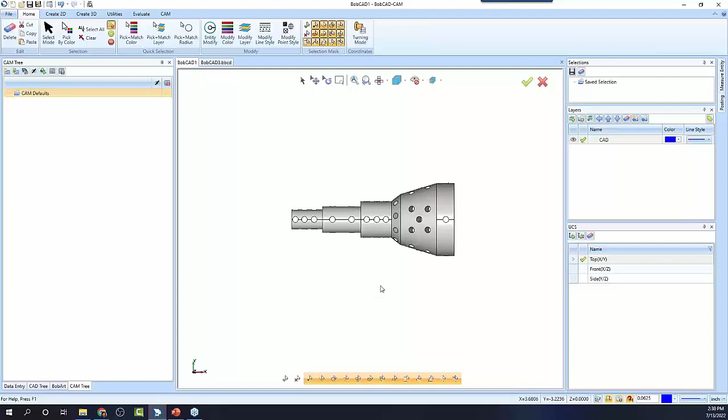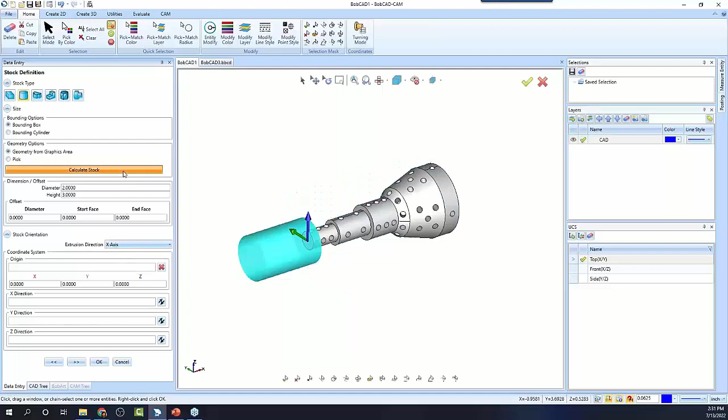I'm just going to create a new job for a 4-axis mill. All right, our stock, we're going to do cylindrical along X. All right, and my 0 position, I'm going to set here. Okay, and then I'll set up another one. Insert setup.

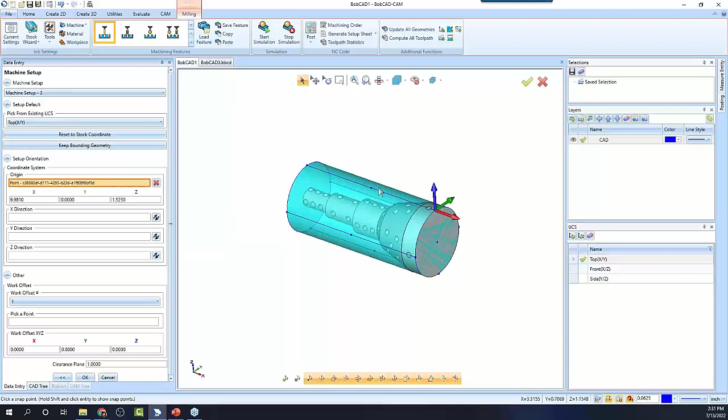And our 0 position is going to be there. Okay, so this one, you can see it's on center. This one's on the top. Okay, so we're going to start with the center one first. We're going to add a wrapping group. Add wrapping group. Geometry is wrapped. Show is wrapped. Use stock diameter.

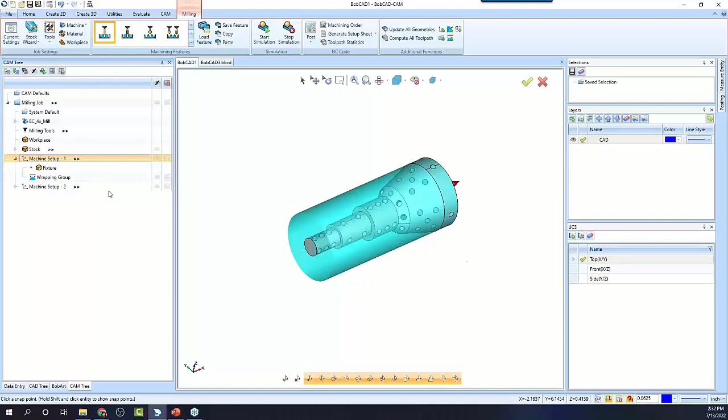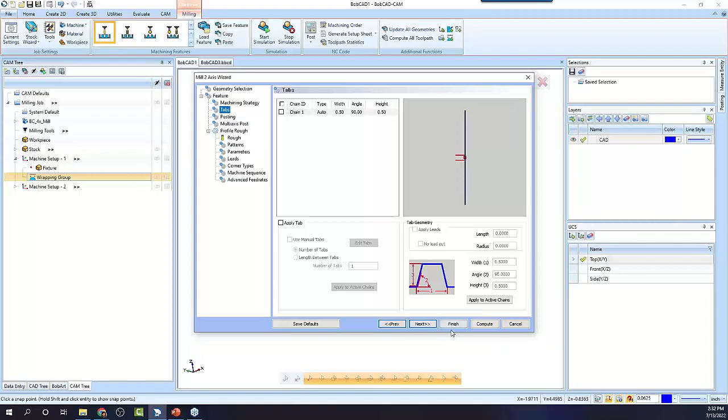We'll say OK. All right, so essentially we want to machine a feature. So under this wrapping group, we can load a feature. So I could say this edge right here, I want to cut. Okay. And then I want it to go down to this depth. Okay. And then the strategy I'm going to use is a profile. And let's just compute.

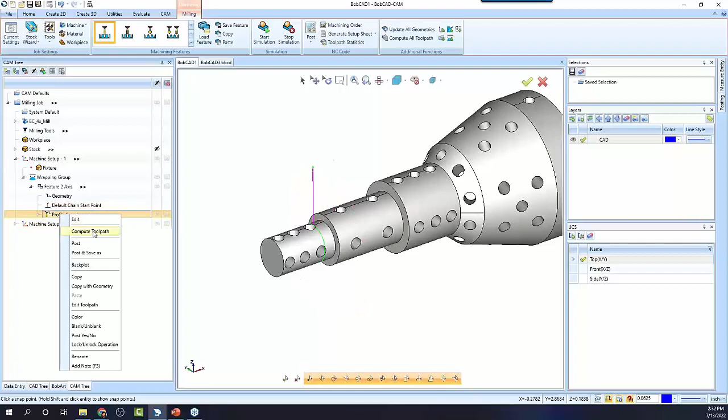All right. So you can see that it is wrapping to it. Let's turn the stock off for a second. Okay. We can see it is wrapping to it. But what we want to pay attention to is the side of the line, and this has to do with your arrow direction. So we could reverse that and recompute. All right, so now we can see using that wrapping group, we can have it just come down and cut that slot there.

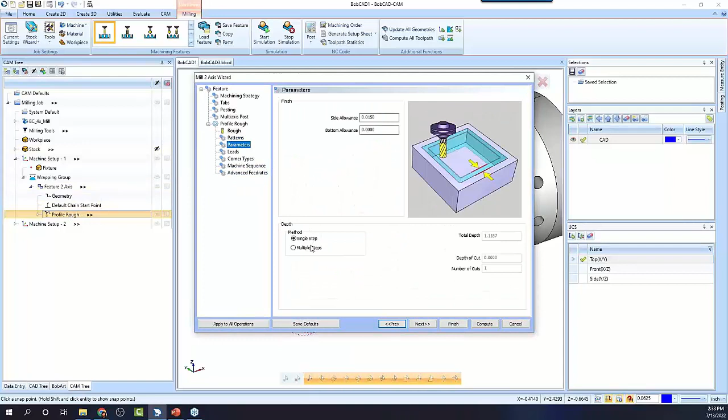We also could utilize some of the other options, maybe have it side rough. Maybe there's an inch of material and we want to take it in 6 passes. All right, so what that will do is step down and work its way around. What if we didn't want it to go to clearance between each pass? We could say, let's see if we can say stay down.

If we have multiple steps, should be able to get it to stay down here. Let me see here. All right. Well, it's not the worst. Let me change this. Let's go to a lead right angle. Okay. Let's go to bidirectional cutting.

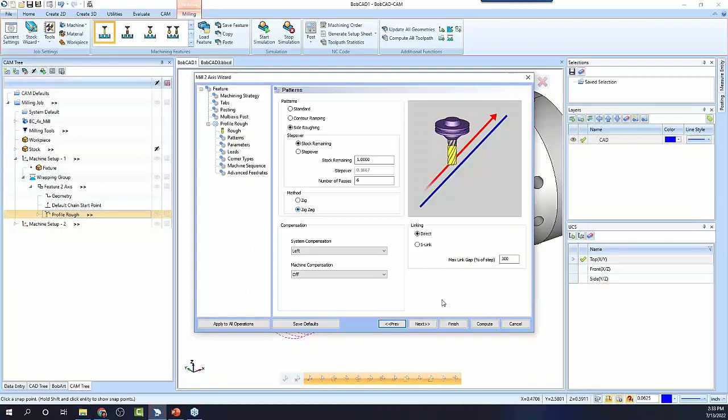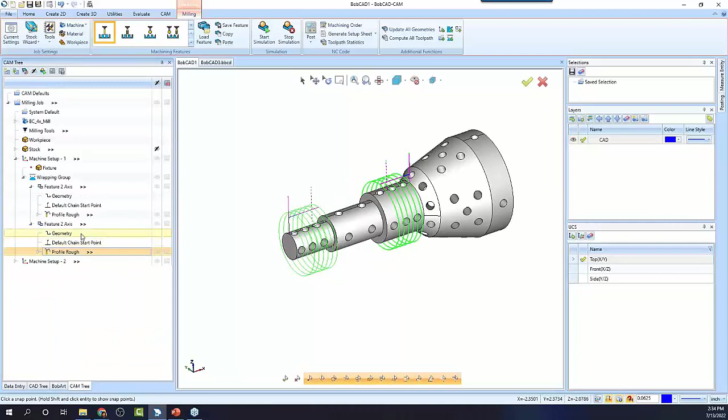Okay. So now just using a standard profile, I selected one edge, I can just profile this and then have it step over as such, right? And if I want to do that at a different diameter, I could just copy that feature, paste it. We'll say yes. I'm going to reselect, say there, pick bottom. It's going to be there. Okay. And compute. All right, I got it going on the wrong side again.

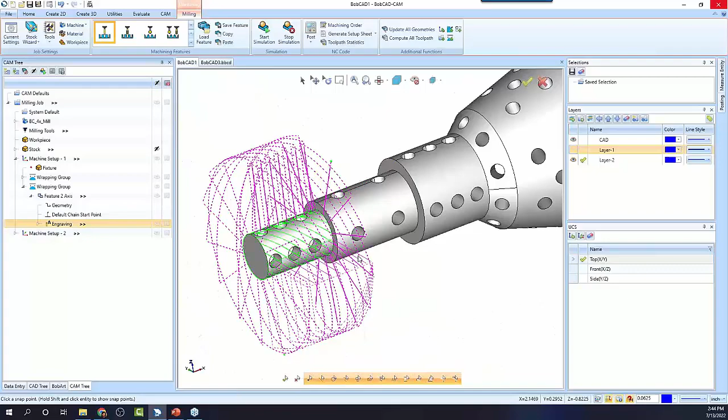So there, you can see how this is just using a profile. Okay, so now you can see how we're putting that pattern onto that diameter. Now, engraving is probably not the best option because it can be difficult to kind of see what's going on there, right? So that's where this wrapping group, where you say, hey, don't show it, and then that makes it a lot easier to see.

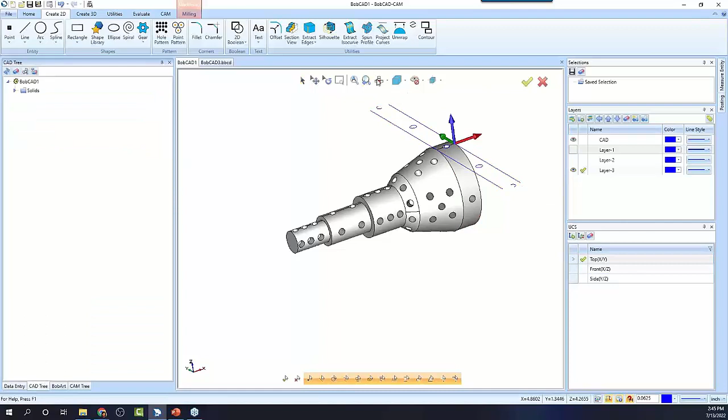Okay, we might come in here and unwrap this first, and essentially the idea of unwrapping it is to just get the area that we're working with. Chain selected or not, this kind of puts it all to the left one side. We're going to just go on center. That's fine. We go to a top view like this. Now we're going to add some text, right? So we'll say, okay, let's fit the text in here.

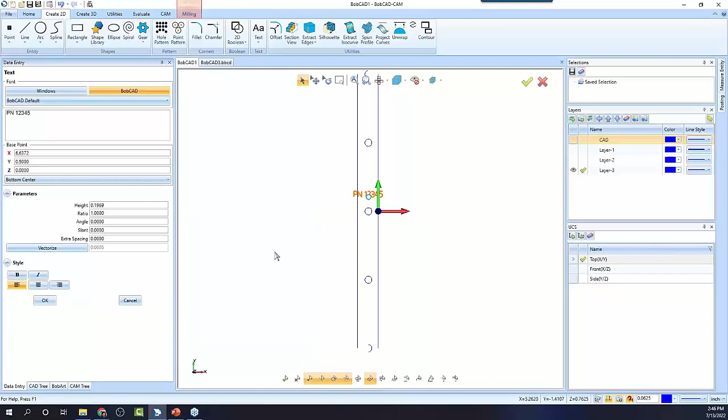So we'll say create text. And then we'll use the BobCAD font. Looks good. Right, so I could either move it here and then rotate it, but I'm pretty sure you can just kick it on an angle this way too. Put it where I want. Okay. So now I have my geometry. It's in X and Y where I want, not necessarily in Z.

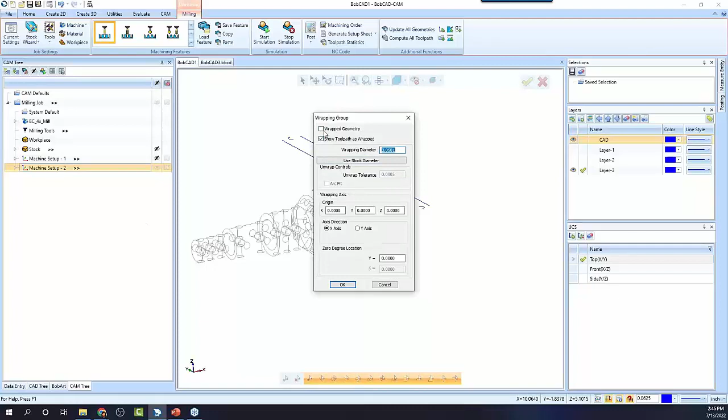Okay, so I'll come in here. I'm going to do a wrapping group, additional functions, add wrapping group. You can also add it from up here too. Add wrapping group is another place. The geometry is not wrapped. We're going to wrap to that diameter. That looks good. This is going to be an engraving routine. So we'll just select our text here.

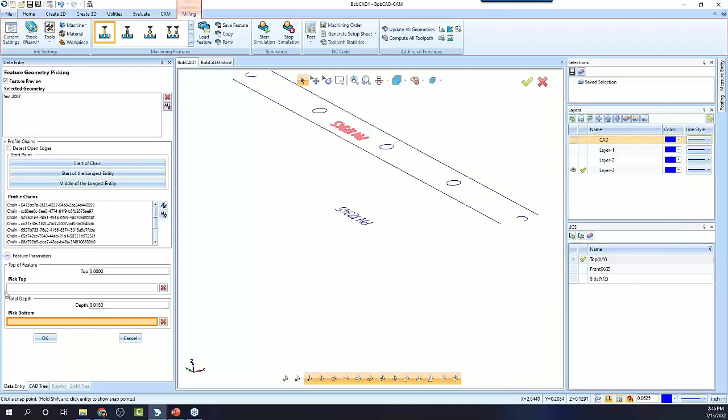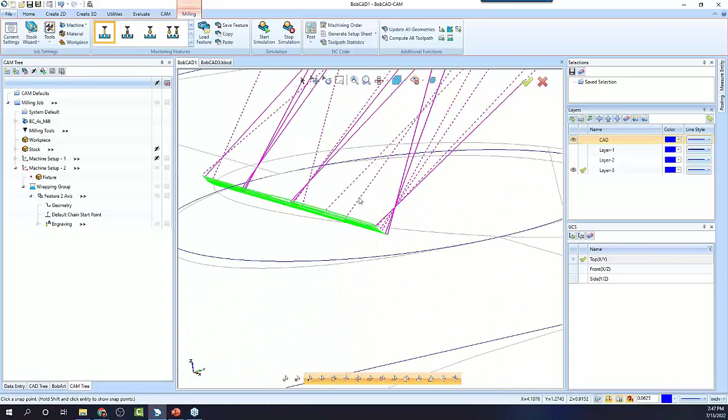Okay. We can say how deep we want to go. All right. And then this is just going to be an engrave cycle. And we want to pick our tool. Okay, so what's happening right now, and I kind of warned you about this before, but see how everything is just kind of getting wrapped around that diameter, because this is matching, the 0 is here.

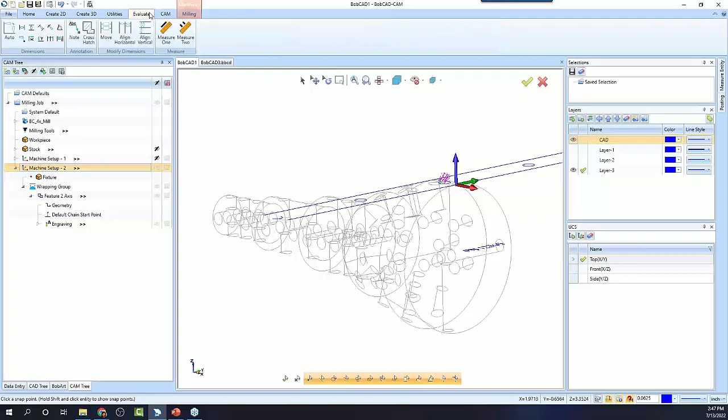What I need to do is I got to tell it how far is it from here down to center line, right? So let's see, if we measure this, what was it? Evaluate. So we measure this, 1.525, right? So we need to go down 1.525 in order to be on the axis of rotation. So this is minus 1.525. Okay, and then now you can see it will rotate along that.